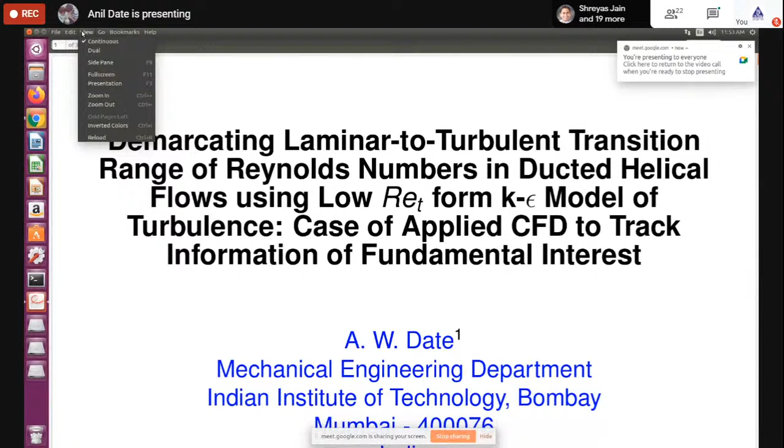Whenever I encounter a person who is a Shah or a Patel, I feel like speaking in Gujarati, but today I'll refrain from doing so.

And I'll quickly move to the topic of the day, and that is demarcating laminar to turbulent transition, range of Reynolds numbers, in ducted helical flows using low turbulence Reynolds number form of the K-epsilon model of turbulence. This is a case of applied CFD to track information of fundamental interest.

I say this because this is a seminar for engineers, and if you ask any engineer, does it really matter to you whether the flow was laminar, transitional, or turbulent? And he says, no, it wouldn't, as long as I know what the pressure drop is and what the heat transfer is. But as you will see on the next slide...

I'll be referring to Osborne Reynolds in a short while, but the order of my presentation is as follows. I have divided my lecture into 3 parts. Part 1 is transition in a straight tube of circular cross-section. Part 2 is CFD prediction of transition in a tube with a twisted tape insert.

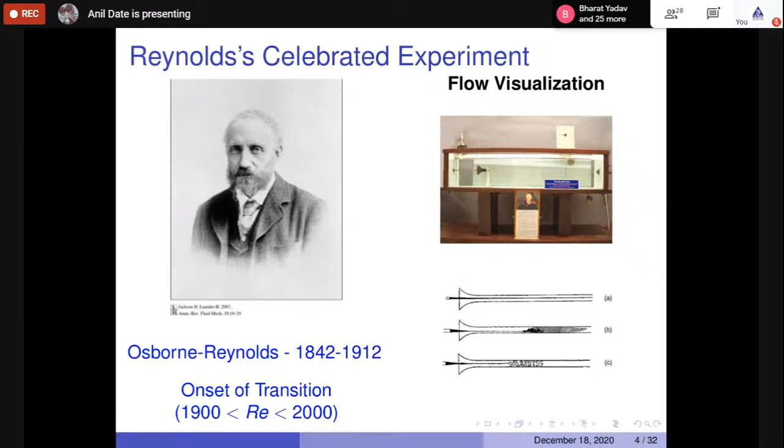Subsequently, of course, as you increase the flow, the dye would begin to smear, and then at a substantially higher Reynolds number, it would turn into what Osborne Reynolds called sinuous motion. He had detected that this transition would take place anywhere between 1900 and 2000. So, for all of you, this Osborne Reynolds is a well-known figure, and I thought I should begin with him. And he was the first professor of engineering anywhere, and yet he looked at fundamentals.

Another way of looking—the modern way of looking at transition—is, of course, to measure friction factor and Nusselt number characteristics in a ducted flow, not by fluid flow visualization, but by measuring friction factor and Nusselt number. As you can see, up to about 2000, the friction factor is 16 by Reynolds, and you have an exact solution for this. By about 3000 or 4000, turbulent flow begins, and there is an abrupt change. So we all associate transition with an abrupt change in friction factor.

The change is not only in the value, but in the trend itself during the transitional Reynolds number: the friction factor actually increases with Reynolds number rather than decreasing, as it would in the laminar and fully turbulent regions.

Likewise, in heat transfer, you know that in laminar flow the Nusselt number would be constant depending on the boundary conditions, but in turbulent flow it would begin to change with the Reynolds number. This peculiar behavior—up to 2000, you see measurements are constant, and then from about 3,000 or 3,500 onwards, you get separation with respect to Prandtl number. Now, it is very interesting to see that while in laminar flow Nusselt number differs depending on the boundary condition, in turbulent flow there is hardly any effect of the boundary condition on the measured Nusselt number.

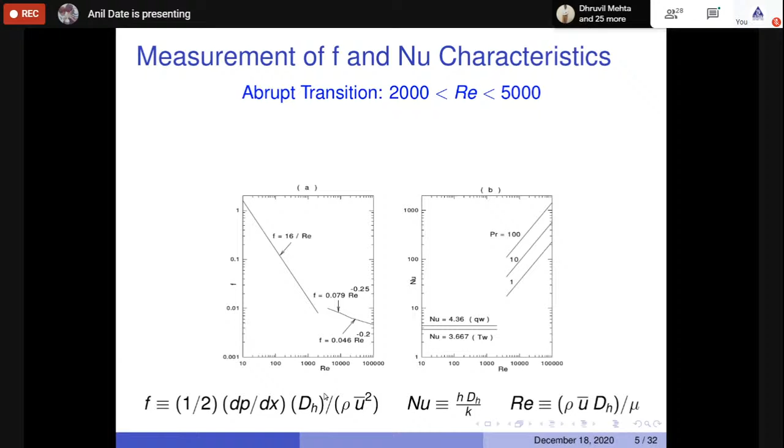The next slide. The third method of detecting transition in a tube was actually used by J.C. Rotta in 1956 in Germany. What he did was use a hot wire anemometer and placed it inside the tube facing the flow at a fixed point. Now, the fixed point may be at the axis or closer to the wall, whichever way you like. But what was interesting was the following.

He kept the hot wire for a long enough time and then recorded the trace of the measured velocity, then split the time up into equal intervals of delta t. In certain intervals there would be a burst or unsteadiness over a time delta t sub t, the burst time within a predetermined interval delta t. He went on adding them over n intervals and divided that by n. Predictably, this quantity would be a ratio varying between 0 and 1.

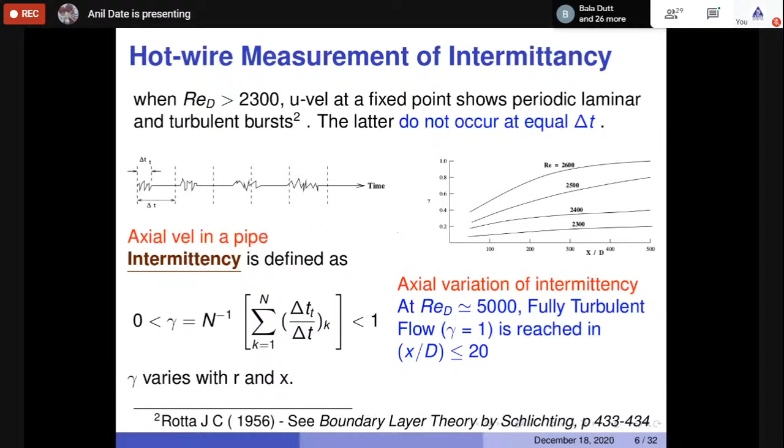This work was done by J.C. Rotta, and you can read about it - it's in German, but you can read about it in a book by Schlichting, Boundary Layer Theory.

Now, of course, the fourth method for detecting transition would be, of course, our friend CFD. One way in which that can be done is by invoking what is called the low Reynolds number, or low turbulence Reynolds number, model of kinetic energy and dissipation, first introduced by Jones and Launder at Imperial College.

Strangely, the model was actually introduced to predict relaminarization of a turbulent boundary layer. In a highly accelerated flow, the boundary layer would be turbulent to start with, but then because of the very high acceleration, it will go on thinning, and ultimately it will become so thin that it is almost completely located in the viscous sublayer.

That phenomenon was known as relaminarization, and they succeeded in predicting that phenomenon using the low Reynolds number model of turbulence. Here, the proposition is the reverse: how does laminar flow become turbulent? That's number one. And instead of an external boundary layer, I'm going to look at the entrance region of a circular tube.

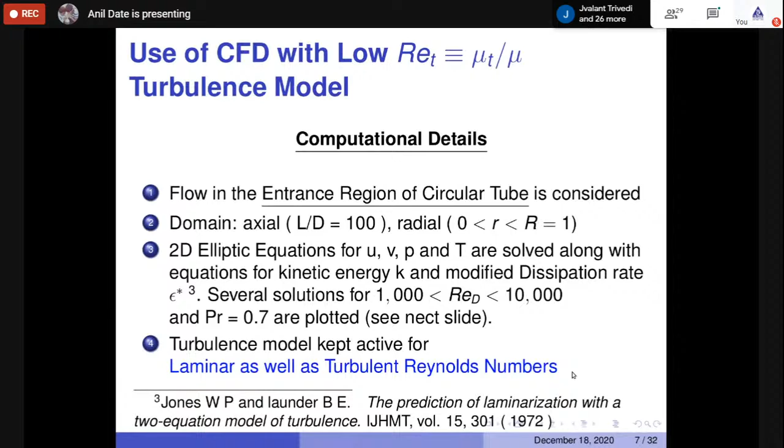Next slide - and this is what I predicted. So these are several discrete solutions plotted on a single graph, starting with Reynolds number 1000 and going up to 10,000.

So let us first of all look at U over U bar, multiplied by 10, and you can see it is showing a value of 20 here at Reynolds number of 1000 at U, in spite of the fact that the turbulence model is active, because the model itself predicts zero turbulent viscosity, and therefore for all practical purposes, the flow behaves like it's laminar. You will see the value remains constant at 2, U max by U bar, that is U centerline by U bar remains at 2, which is the exact solution everybody is familiar with.

Something happens at about 2300, and the peak value begins to decline, declining very sharply at about 3000. From there on, it declines gradually, and at 10,000 it reaches a value of about 1.3, very characteristic of turbulent flow, where the velocity profiles are very flat.

So U max by U bar is 1.3.

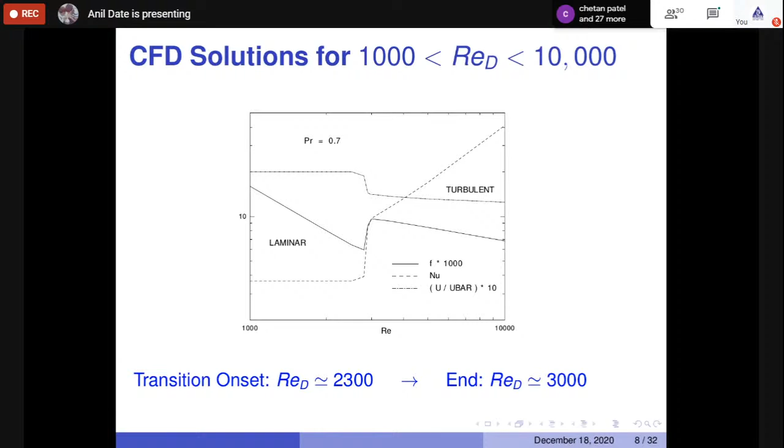Now here I am presenting radial profiles in wall coordinates. As you know, U plus is U over U tau. So this is the profile predicted at 3000, which is the end of transition.

You will be surprised to know that actually the laminar sublayer extends up to Y plus of about 5, where U plus equals Y plus, but then it begins to change up to 10 or 11.6, and then a fully turbulent flow begins.

So that is the specification of the universal law, 2.5 ln Y plus plus 5.5, and you see that at 3000 it is not vigorously turbulent. The core of the flow is still not vigorously turbulent.

Finally, the value of RET, that is mu t by mu, varies with radius. You see it is almost 0 in the sublayer region, and it goes on increasing to about 7. So right at the centerline, it is no more than 7.

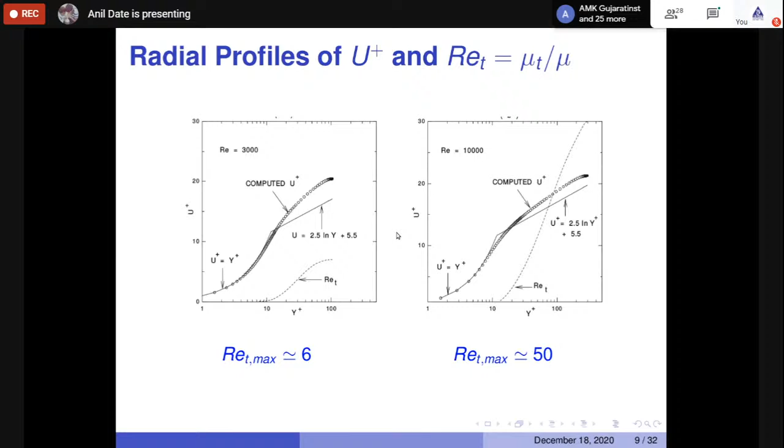So the summary is the following: the transition range of Reynolds numbers can be estimated in four ways - by flow visualization, from intermittency distribution, from gross friction factor and Nusselt number characteristics, and by use of CFD using a low Reynolds number model.

The tentative broad agreement among all methods is that for Reynolds number below 2,300, the flow is definitely laminar. For Reynolds number greater than 5,000, the flow is definitely turbulent. And RET max is definitely less than 10 in laminar flow, and RET max is definitely greater than 50 or 100 in turbulent flow.

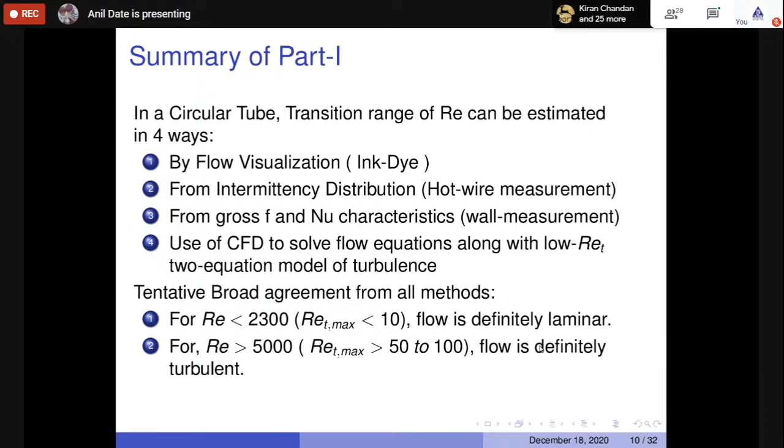Now I begin with part 2, in which I do CFD prediction of transition in a tube with a twisted tape. You can see there is a tube with a twisted tape inside, spanning the diameter of the tube, and it has a thickness delta. The tape has a thickness delta, and the dimension h has very special significance.

The h is the distance for a 180-degree rotation of the tape, and therefore you will see, apart from the Reynolds number, h divided by diameter as well as delta divided by diameter are additional parameters influencing friction factor as well as heat transfer. So let's see - the question I ask now is, which among the four methods can be used to estimate transition?

I think it is very obvious that the dye method will not work, because the dye will smudge even during laminar flow. Second, intermittency may perhaps help, but the presence of probe can disturb the flow in a variety of ways, so that will also not work.

But measured F and Nu data, yes, that can really help detect transition because of the sudden abruptness, if we show it. And then finally CFD - we can also do CFD. So we now converge on the idea that measured F data and CFD are two possible candidates to detect the transition.

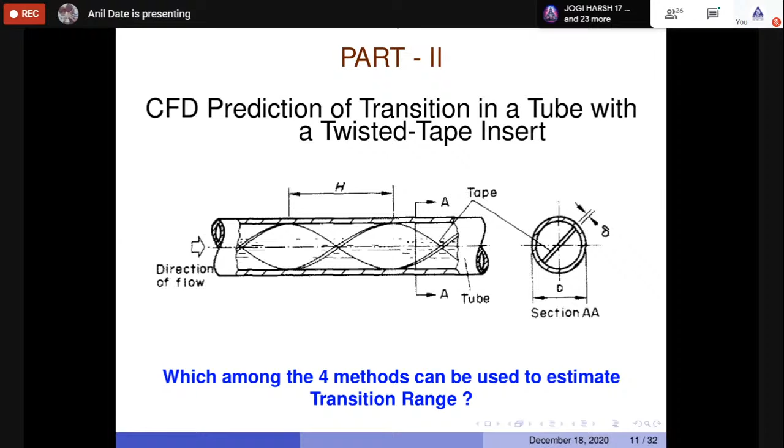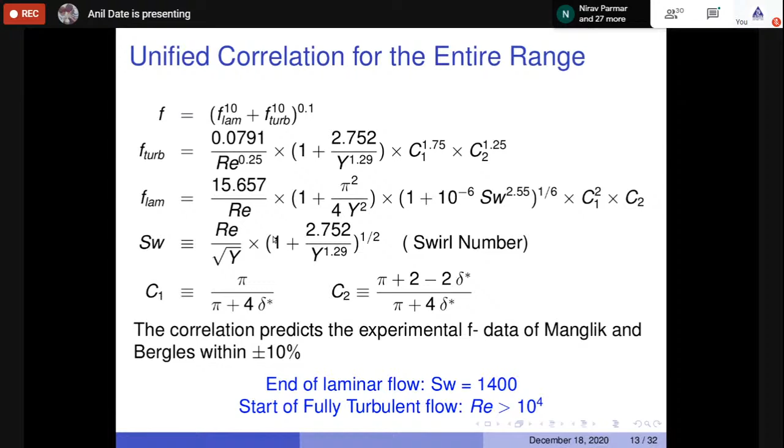So one of the things they surmised from the correlation was that the end of laminar flow occurs at 1400, and the start of fully turbulent flow at 10,000. You will appreciate this shortly, but this was the conclusion they drew from their F correlation - that the laminar correlation ceases at about swirl number 1400, and beyond Reynolds number of 10,000, the correlation is dominated by F turbulence.

Our present approach is, of course, the CFD approach, and since the flow is three-dimensional, one tries to simplify this by adopting a rotating coordinate system.

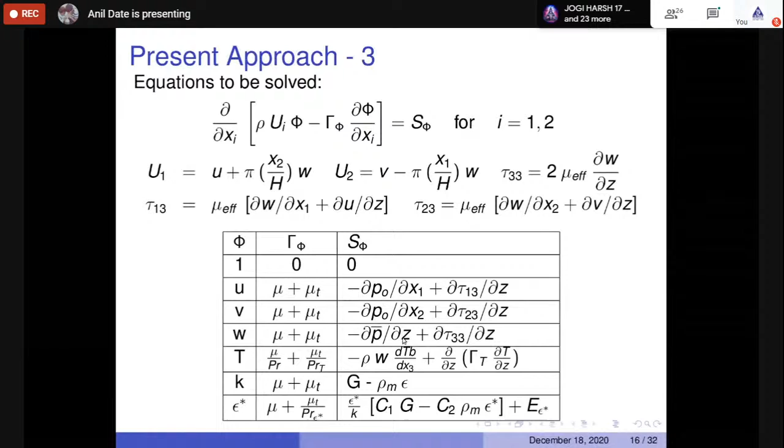Plus the fact that derivatives with respect to x1 have further second derivatives taken with respect to z, which means this term actually has 4 terms in it. When squared, it becomes even more terms. So evaluating this in a CFD is very, very demanding for i equal to 1, 2, and 3, all 3 are to be done.

The most important factor is that here you don't have to give boundary condition away from the wall. You can go right down to the wall and specify kinetic energy and epsilon star at the wall as 0. This is the most advantageous, beneficial aspect of using a low turbulence Reynolds number model, that all boundary conditions are very, very easy to give.

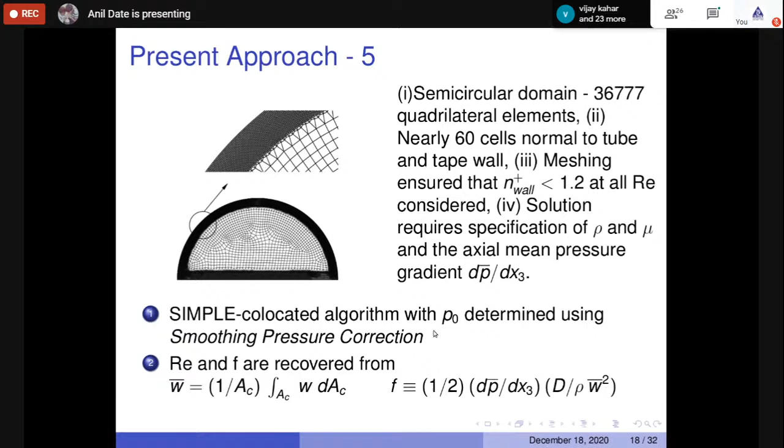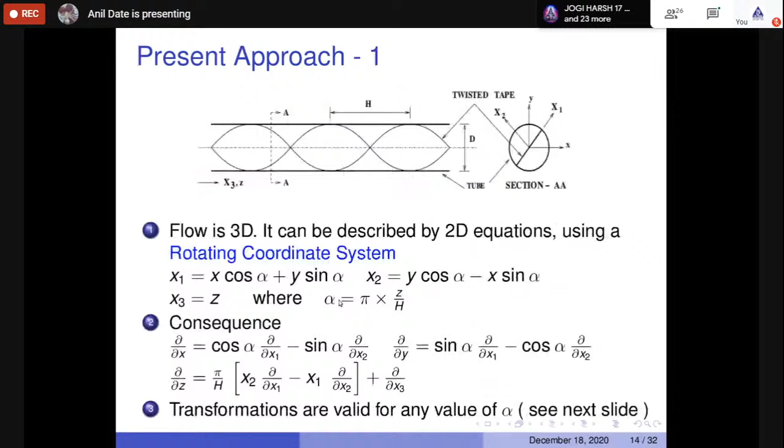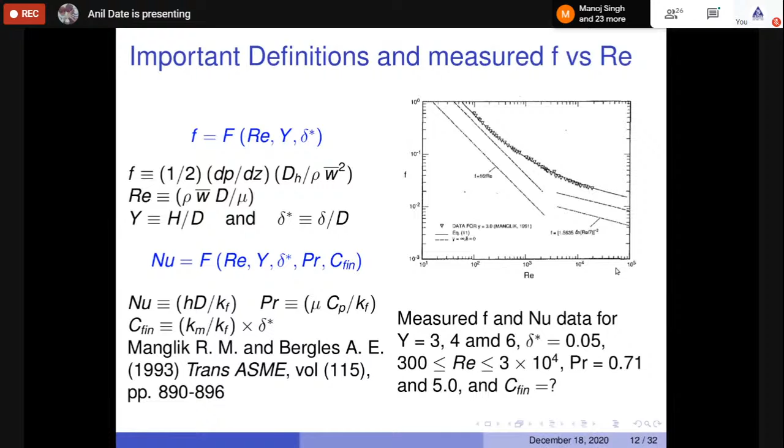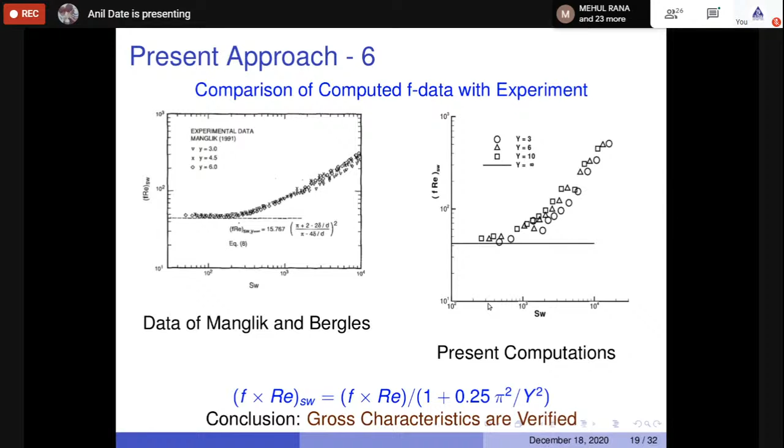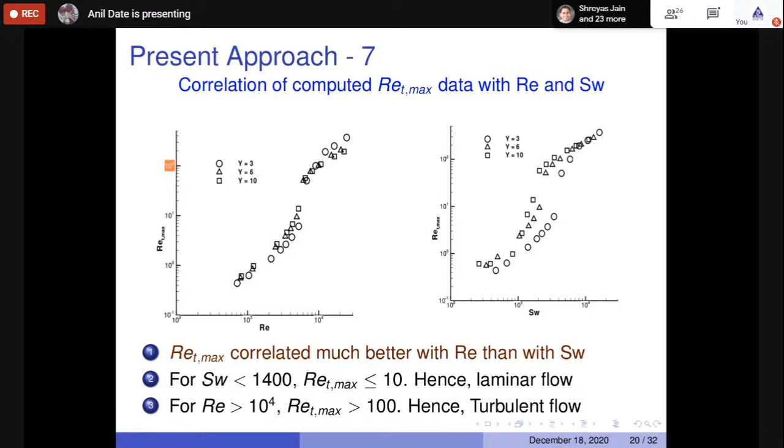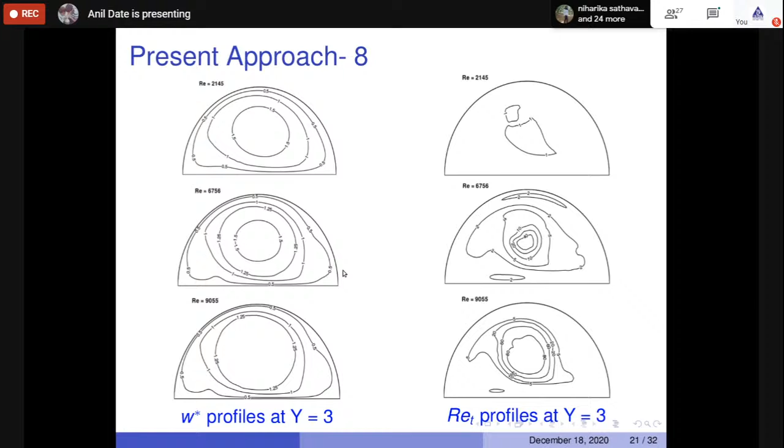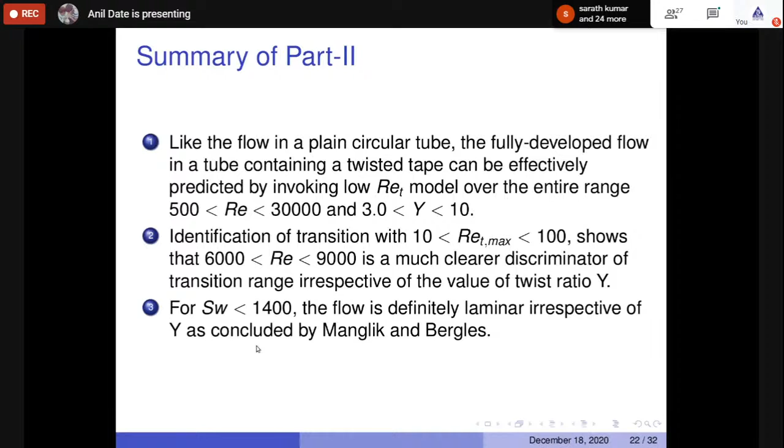So for swirl less than 1400, the flow is definitely laminar irrespective of value of y, as concluded by Manglik and Bergles.

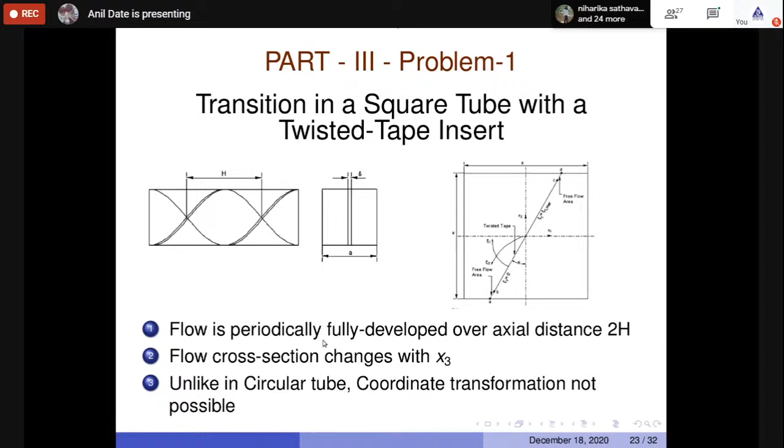Because the duct cross section goes on changing, a simple coordinate transformation is not possible. So what do we do then? Now here are some typical domains which I'm trying to show.

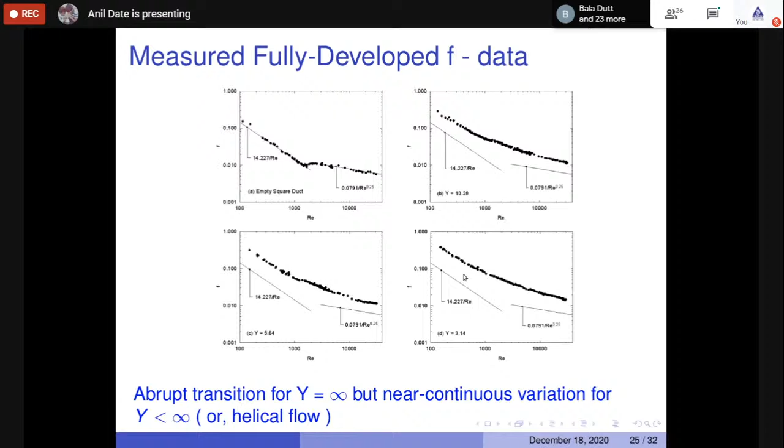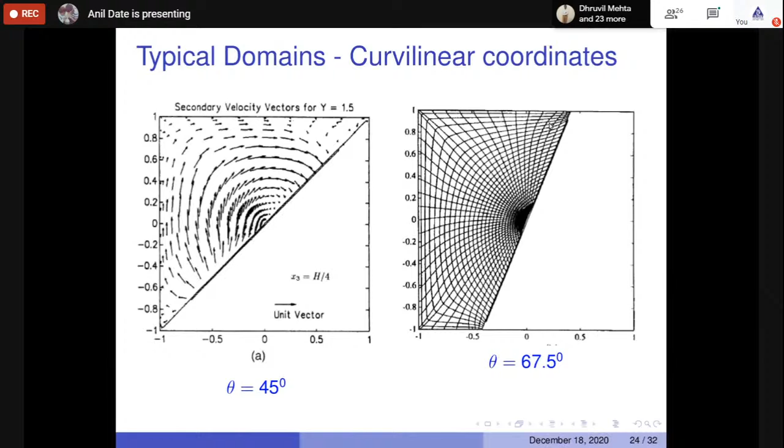So the problems are the following: how to implement a low RET model, because you have to generate fine grids near the tape wall as well as near the duct wall, and the duct cross section goes on changing. How to provide a large number of grid elements close to the tape and the duct surface? Should one use curvilinear grids or unstructured grids? And how to succeed in implementing axially and circumferentially periodic boundary conditions for scalar as well as turbulent variables?

Now, although I am suggesting here a low RET model, the high RET model was implemented by Ray and Date, and the paper was published in IJHMT volume 46 in 2003.

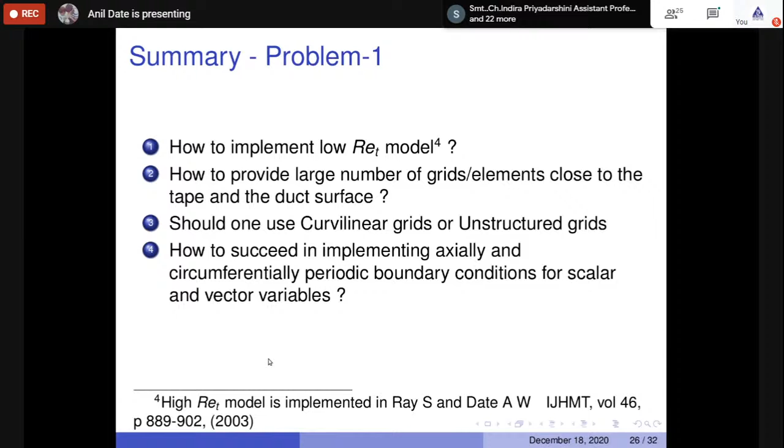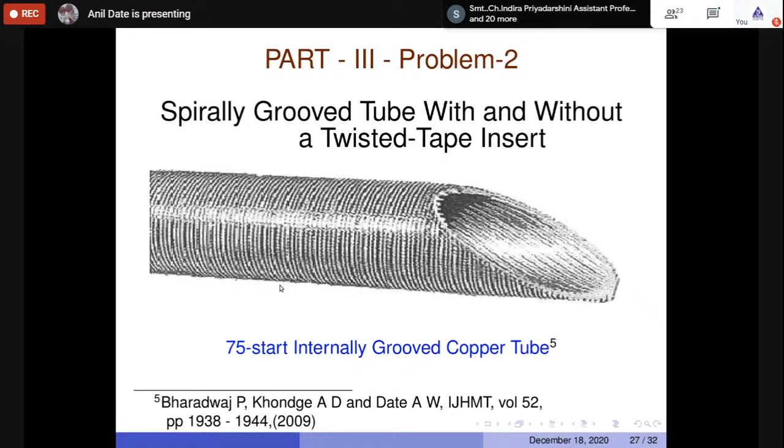Incidentally, this tube, a 75 start tube, which means there are 75 grooves along the circumference, was supplied to us by Blue Star Limited in Mumbai, which is something as engineers we should be interested in.